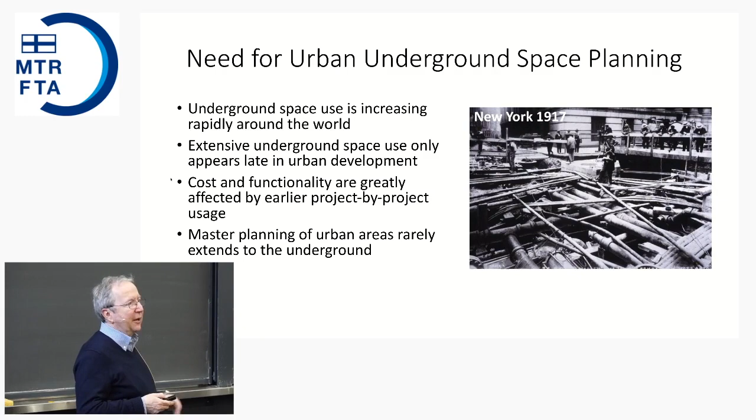You see that people have been thinking about this for a long time. There was a French engineer and planner who wrote about this and produced a number of sketches, like the picture on the right, looking at how you might use the public right-of-way in urban areas to improve transportation and provide better connection into the buildings on either side.

There was also the city engineer of Philadelphia in the US who wrote a paper you can download, from 1914, that basically said we already have a mess under our city streets. We're going to get more kinds of infrastructure that we don't even know what they are right now coming in the future. We'd better plan better for the underground.

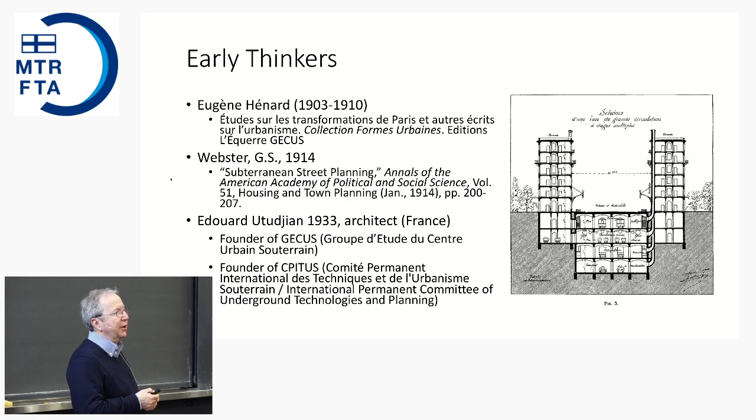And then the French in the 1930s, extending all the way through to the 1970s, formed a group to look at urban underground space planning. They had a magazine called Le Monde Souterrain, the underground world, and looked at the architecture, the planning, as well as the engineering of the urban underground.

Today, the different interest areas are following a rapid growth of interest and urban sprawl in the 1960s. Some well-publicized environmental disasters occurred in that time period, and energy consumption and energy use also made people look towards the underground because of the more constant temperature environment.

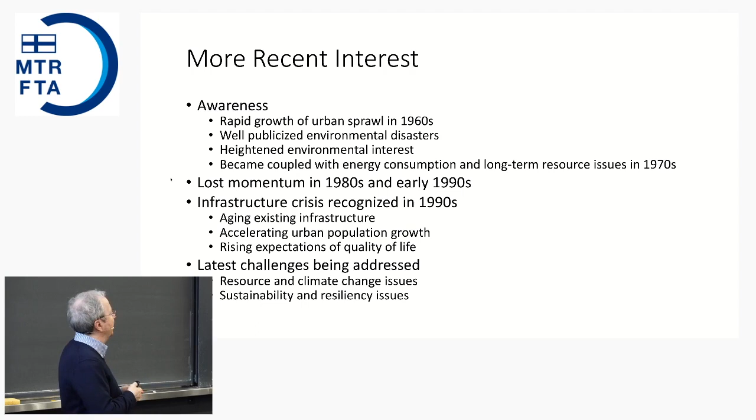Most recently, there's a lot of interest in sustainability and resiliency of cities, how we can provide for our future generations, and how our cities can withstand both natural and man-made disasters.

I won't go through this in detail, but you can track the relationship of building things underground to sustainability, and a copy of these slides will be available along with the lecture, so you can look at this at your leisure. But some of the main influences are that...

using the underground allows you to build a compact but livable city. In other words, you can put a lot of the things that don't need to be on the surface underground. You can still have fairly dense development above ground but still retain open space, and building compactly has a number of advantages in terms of sustainability.

The next two are isolation and preservation. You can group those together, and you can hide things underground. You can separate them in terms of climate, vibration, and not being able to see the things you put underground. That also has some benefits in terms of sustainability.

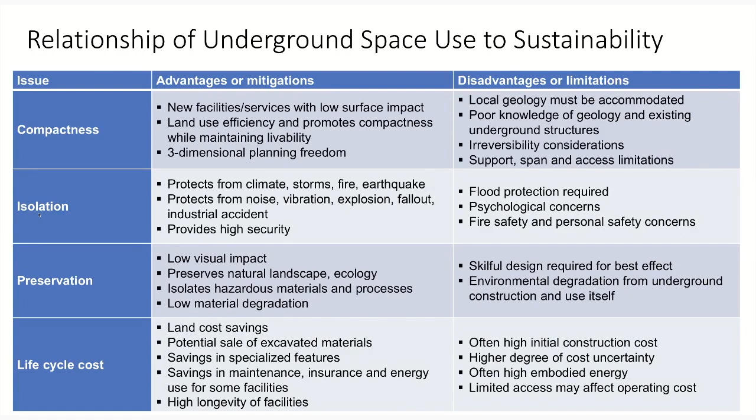And on the right, there are some of the disadvantages or limitations that go along with those benefits. So for any particular type of facility, you do need to look at the balance sheet, if you like, as to whether it makes sense or not.

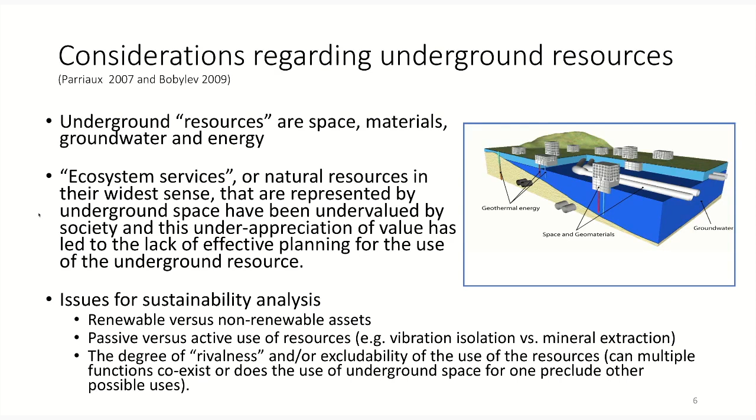Starting around 2000, the late 1990s or early 2000s, a researcher, particularly Dr. Parriaux from Switzerland, started to look not just at using the space underground, but saying the underground provides several types of resources that are important: space, materials which may be under urban areas, groundwater, and also the energy potential. We need to look at that whole system rather than just the use of the space, because using one of those resources may preclude or damage the use in other ways.

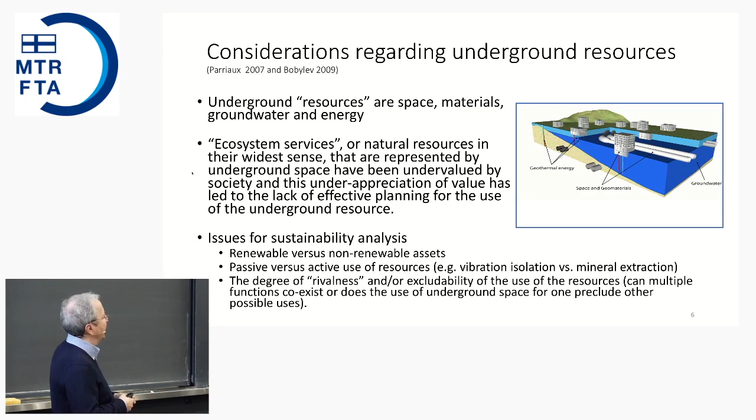And so you can find now in the literature quite a few papers and research projects that build on those ideas. And a lot of that comes down to deciding whether uses exclude other uses, or whether two or three different uses can occur together.

This is just a chart dividing the uses of the underground into renewable and non-renewable. And actually, the use of the underground, while it may help make the overall city more sustainable, most of the uses of the underground are in themselves non-renewable. In other words, once you use it that way, that resource is used up.

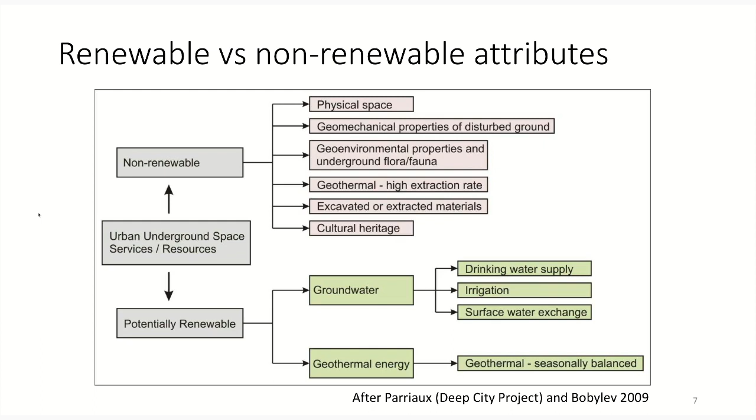The only one that appears on both the bottom and the top is geothermal, because if you use geothermal at a high extraction rate, you are changing the resource. If you're extracting heat, that area of the ground is getting cooler, and you're able to get less heat out in the future. If it's seasonally balanced, then it can be essentially fully renewable.

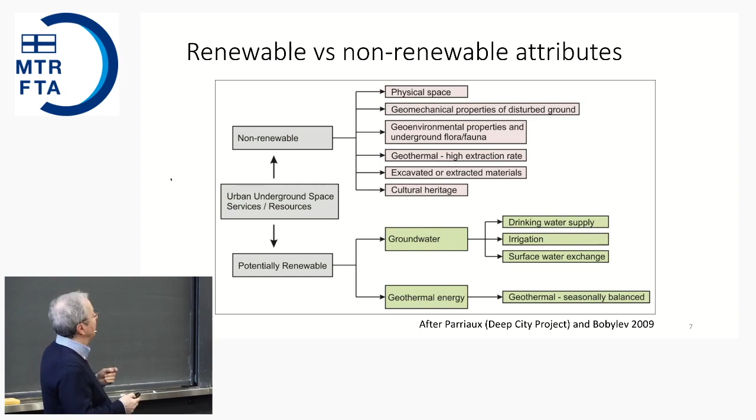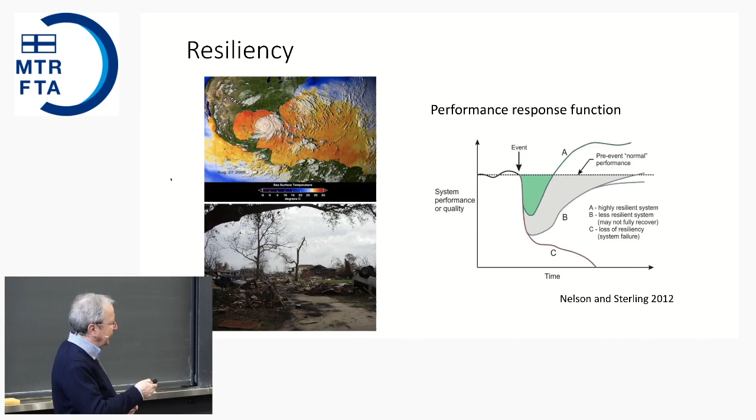As in the last case of sustainability, if we look at how the underground relates to that, we can find that for most external events, the underground does pretty well. It provides good protection. Flooding is obviously something you have to take great care with in an underground structure. But not all underground structures require you to go down into them. If you have a hillside or a mountain, you can have an underground structure that still does many of the other good things of the underground, but isn't susceptible to flooding because you go on a level or go up into it.

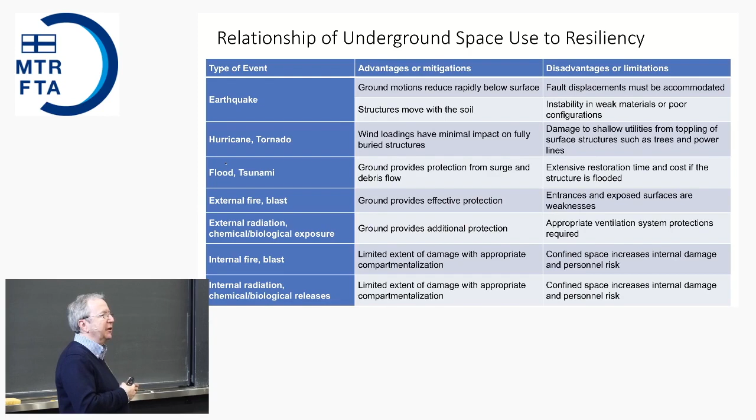Even with a big system like a metro, you've got a lot of investment, a lot of equipment, a large system, and only a few selected points that connect to the surface. So while in one sense it's vulnerable, if you protect those entry points, ventilation points, etc., you can have quite a resilient system. It's the internal events that give more problems to the underground, like an internal explosion, fire, or chemical release. There are ways of dealing with it, but that needs a lot of care when designing an underground structure.

A lot of the problems of resiliency today have not so much to do with the physical infrastructure of any one type, but the fact that everything is interrelated. Telecommunications, electric power, water supply, the availability of oil and gas, transportation systems - they're so interconnected that if any one goes down in a serious way, it has a ripple effect through the whole system. And with a lot of automatic controls operating between those systems, we don't fully understand the potential impacts in such complex systems.

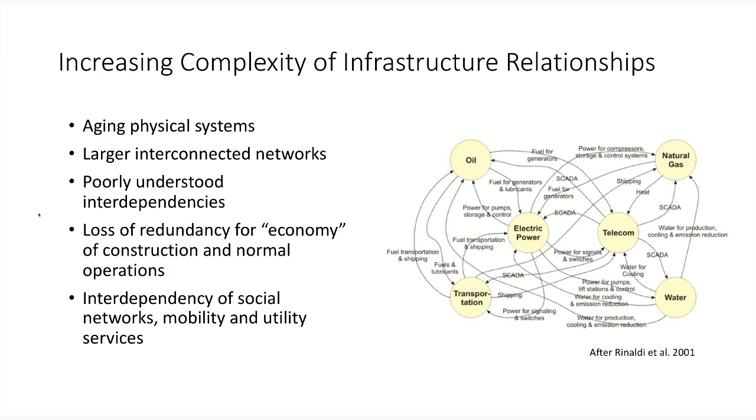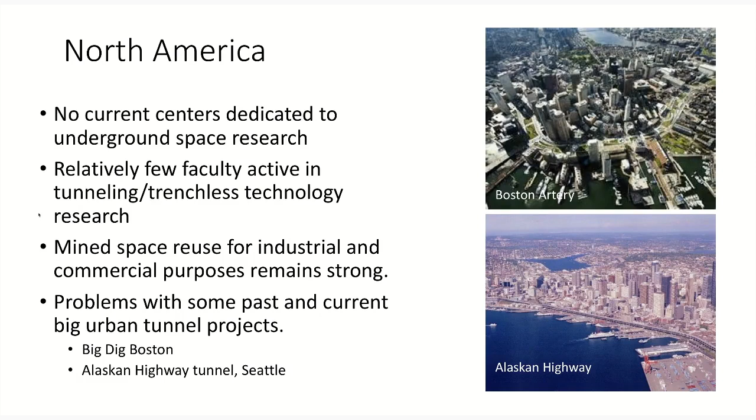Let me switch now and go through some different areas around the world and tell you what's been going on, or what is going on, in terms of underground planning, and what has gone on.

In North America, there are quite a few large underground projects being built, but not so much activity in terms of underground planning. The center I directed for 18 years at University of Minnesota closed in 1995, and there's no similar center at the moment anywhere in North America. In fact, there's a remarkably small number of professors and research groups that deal with tunneling or underground construction at all. The Colorado School of Mines is an exception, and there are a few other places. There's plenty of soil mechanics, plenty of rock mechanics, but dealing with underground construction, underground space use, tunneling - not so many.

There is very big underground space use in terms of reuse of mine space - I'll talk about that. There have been some large projects recently that have had major cost overruns or major issues, including the Boston Artery, which is done now, and the Alaskan Highway, where the tunneling is finally done, but I don't believe the tunnel is open yet.

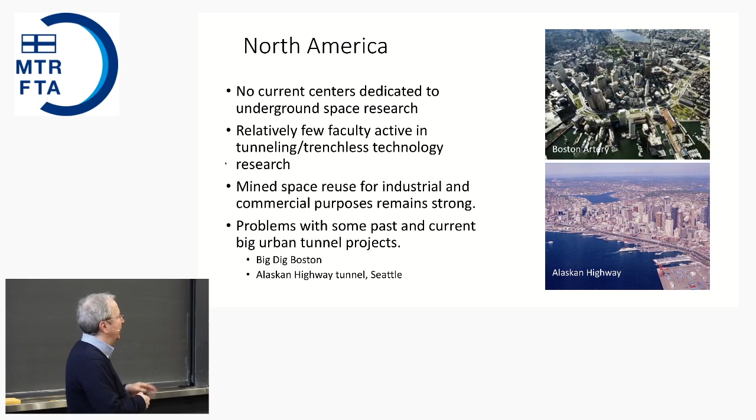Anyway, they got it going again, and the tunneling is finished. I think it's going to be the same, because the tunneling option in both Boston and Seattle, where the Alaskan Highway is, allowed the city to reconnect to its waterfront. There was a time, and you can see it in cities all around the world, where the ports became less important, a bit run down, and people said we need better transportation, let's run the freeway right between the city and the waterfront, where the land is cheap and things are a bit degraded. What that did was just shut the city off from one of its most valuable assets. Tunneling allows you to undo some of that.

We talk briefly about the city of Minneapolis, one place that quite early on did an underground planning study. Largely because our center was at the university, we were pushing the city to do that. We cooperated with the American Planning Association, and there is a planning advisory report dating from '81 or '82 that was published.

It had a very favorable layer cake geology: glacial till on top, then a very strong limestone, and then a soft, easily excavated sandstone that was drained out by the Mississippi River cutting through. So you could go into this soft material with a hard material forming a flat roof, spans up to about 15 to 16 meters, and in dry material. This layer cake geology extended underneath quite a bit of the Twin Cities, and had been used for cheese caves, beer storage, mushroom growing, but we were looking at a more extensive use, and did a planning study.

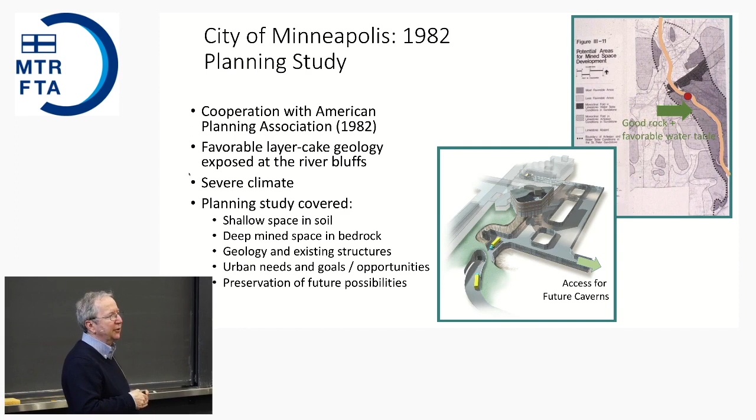We've heard about Kansas City. Are any of you familiar with the underground space in Kansas City? Heard about it? Yeah, a few people. There are probably more than 10, perhaps 15 or 20 different facilities in the region. They're mostly along a river bluff, so you can drive into the underground.

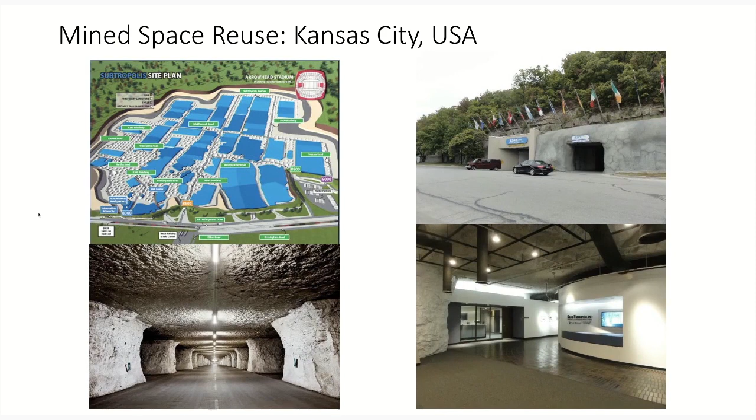They are typically maybe 30 to 50 meters below the ground when you get away from the bluff. There's a very nice parting plane in the limestone, and the rock that is good for aggregate for concrete and for road construction is in this layer. You blast very carefully, and in most areas you can have a roof that really doesn't need any rock bolts to be stable.

I think there are about 8 meter by 8 meter pillars, and perhaps a little wider, maybe 12 to 15 meter span across. This is a model in one of the facilities, and those little dots are the pillars. This is more than a kilometer in each direction. This is the office of the management company in that facility.

Over all these facilities, there are probably more than 5,000 people working underground doing industrial work and warehousing, and a good part of the National Archives for the country is put in these types of facilities.

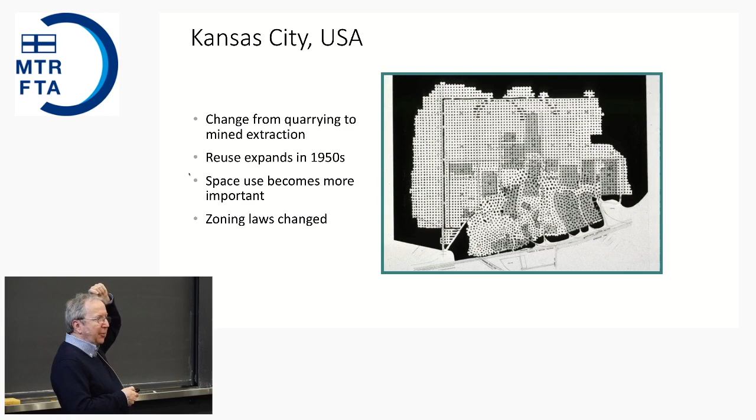The local planning department got involved in helping to facilitate that back in the 1970s and 80s. They changed the zoning laws. This is the same facility that was in the model, but a slightly earlier image of the underground, where all those little dots are 8-meter by 8-meter pillars. Here's the bluff along the bottom, and in that shaded area there.

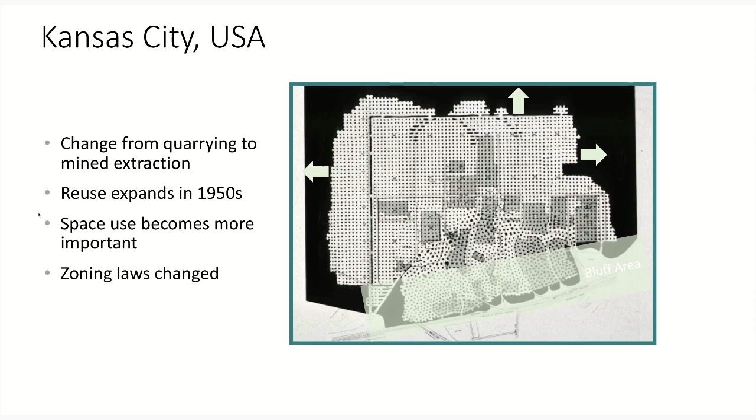These slightly darker areas were leased facilities, and I think that plan was made sometime in the 1980s, so much more extensively used now.

They were able to bring a railway line in so that a train could be unloaded in the underground. If you notice, the pillars here are all irregular, and here they're regular, except they've been modified to allow a rail line to come in up in that area.

Around this time, right here in the expansion, they realized that the eventual use of the space was more important and potentially more valuable than just the mining for sale as an aggregate.

So here is somewhere where, if I back up, you get space like this on the lower left. That's paid for by the mining. And then you just have to run in lights, put something down on the floor, and you've got an industrial space that they rent for about half of the price of industrial space above ground.

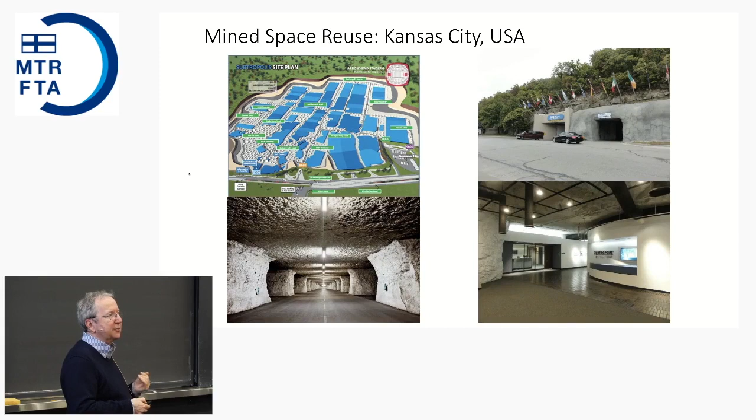Move up to Canada, quite a bit of underground in Canada and mining. But some of the things with regard to planning that it's known for is the underground shopping and pedestrian areas in Montreal and also notably in Toronto. These connect the metro station, the rail lines, most of the downtown buildings, university, many different types of facilities, and make the whole of the downtown a kind of indoor environment.

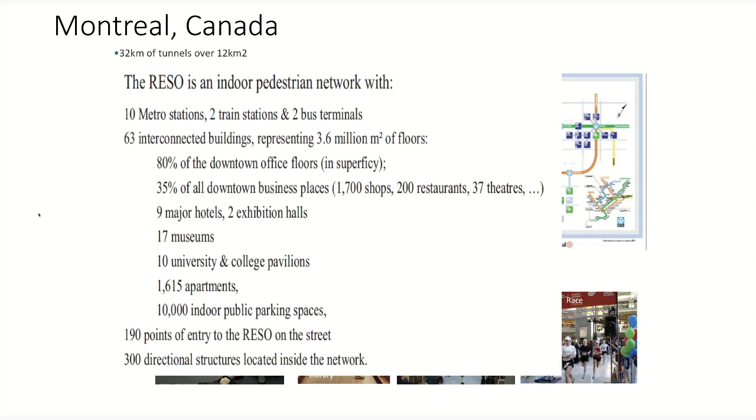Similar, I know you have pretty much the same in Helsinki here, and I think probably you have some of the same issues in Helsinki. It's a tremendous system. It's enabled the downtown to compete with the suburbs in terms of attractiveness as a shopping and commercial destination.

But if you look at part of the system, you can see that the underground pedestrian connections are rather convoluted. And the person who worked with this system said, I always choose one of the worst parts of the system to show.

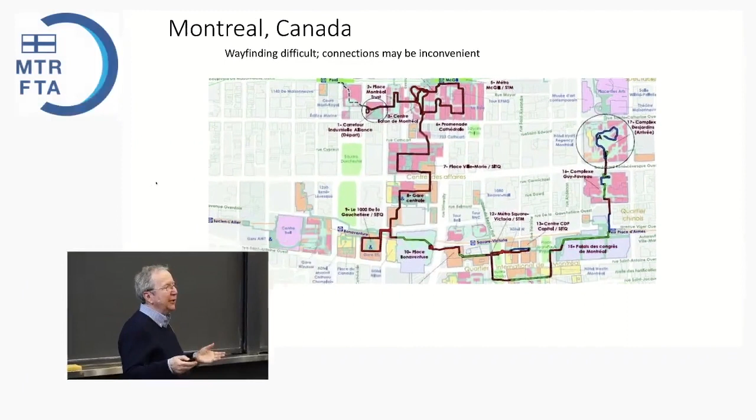So, I think there are parts of the system that are much easier to navigate and more obvious, but that is one of the drawbacks of a system where they basically encourage the developers to connect to the system, but they really didn't control where they connected, or try to put it all into a simple and easily understood system.

Let's shift to Europe. As you know, many large infrastructure projects - there's been a sort of re-evaluation and an upgrading of safety systems in the past couple of decades.

Scandinavia, and in particular Helsinki, has kind of shown the world, if you like, how to do planning for the underground. Although I think it's fair to say that most of the underground planning effort has been related to the use of the rock resource in Helsinki, as opposed to, let's say, connections like Montreal amongst the downtown buildings.

The Deep City project, with its concern for thinking about all the resources, the underground, started in Switzerland. There's quite a bit of interest in urban underground space in Russia, but it's hard to identify exactly if that kind of planning is going on or not.

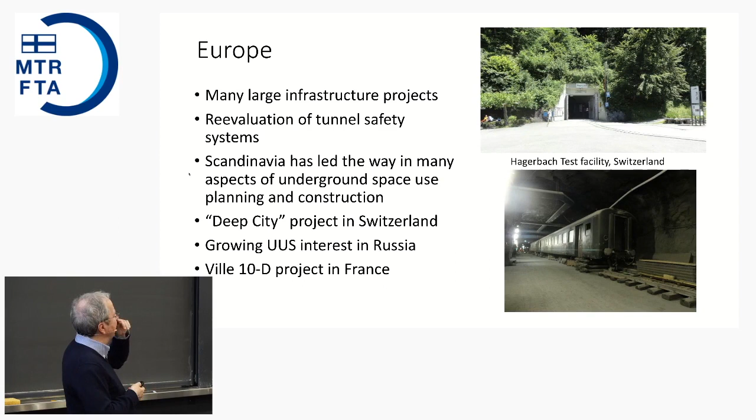France, which has done a lot with the underground over the years, has been trying to sort of revitalize that interest with what they call the 10D project.

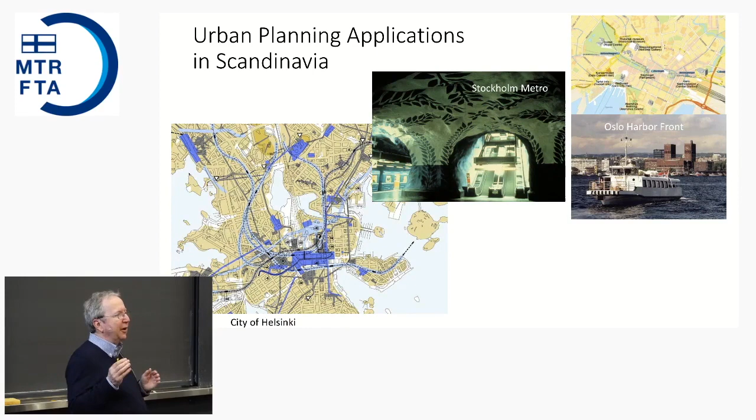And I think that if you look around the world, in a lot of areas, you can find that underground space use becomes a topic of some significant interest that lasts for a while, and then people get so far with it, and they kind of go as far as they can, and then the interest dies away, and another decade or two later, someone says, hey, we should be thinking about the underground, and then it kind of starts again. And certainly that's been the case in Minnesota.

So Helsinki on the left, you know, Stockholm is famous for its Blue Line, and is currently doing a lot of underground construction.

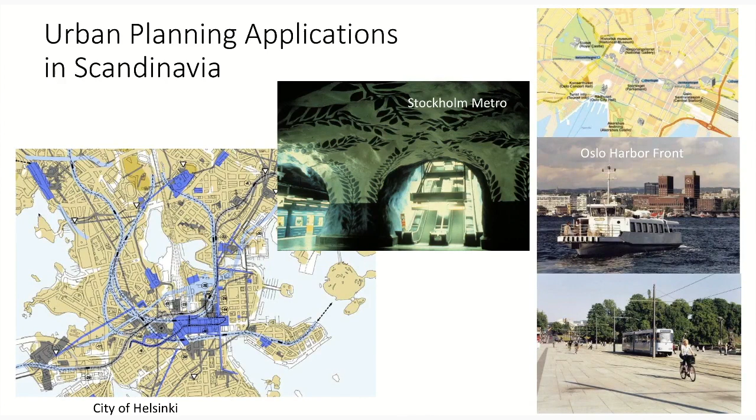Oslo also has this very good example where the freeway that cuts in front of the city hall has sparked, over the last two decades or so, huge redevelopment of that whole waterfront area that must just dwarf the costs of building the tunnel. But just before I move on from that, that appears to be such a good example, but it doesn't appear to be any analysis of the overall impact.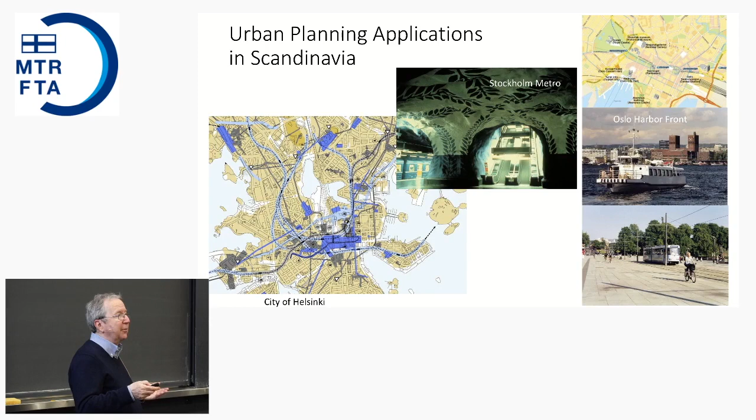We talked earlier about the cost benefit. I think that in many of these cases we need to get some real estate and planning professors and their graduate students to try and go back and track values and the opinion and all those things to try and track and document whether these projects, even though they cost a lot of money, are valuable in the long run.

Are we ready to do that? How are we going to do it? Who's going to do it? Who's going to pay? Do we have a policy? And they shifted around 1990 from having very little underground tunneling and underground works to actually, in the universities and in the planning departments, shifting to really look at not only underground but also multi-level planning for their spaces.

And within about 5 to 10 years, they did the Green Heart Tunnel, which was really on the forefront of tunnel boring. They introduced tunnel boring machines that they hadn't used before, and they had big research departments, for instance, in Delft University.

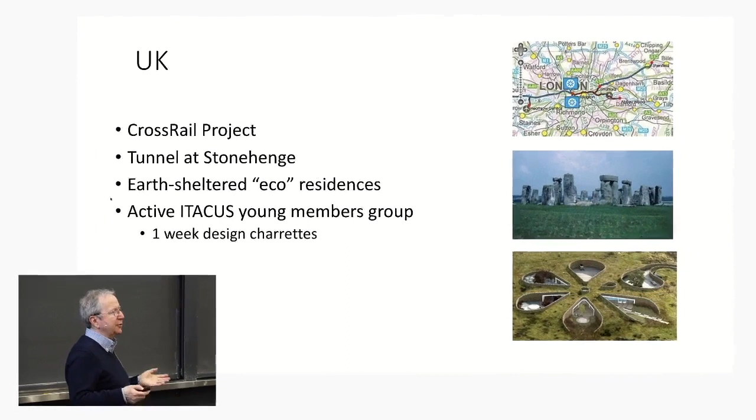UK, another country, huge amounts of underground construction, especially in London, but not so much cross-disciplinary or cross-infrastructure planning for how to use the underground.

It does appear they're finally going to build the tunnel for the road near Stonehenge, which has taken a long time to come about. And they do have an interesting activity, the ITA Committee on Underground Space. They have a younger members group.

And one of the things that ITACUS has been doing in connection with one of the planning groups, I can't remember the acronym for it, but anyway, they've been hosting one-week design charrettes with the young engineers and a couple of senior people.

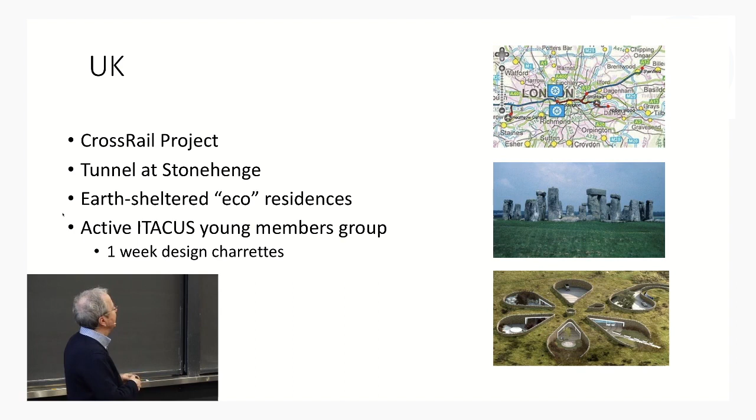City of Glasgow, for instance, had them come in and look at one area they were looking to redevelop. And those really developed some very nice ideas. They're great training for the young engineers and planners and architects, and I think a very successful program.

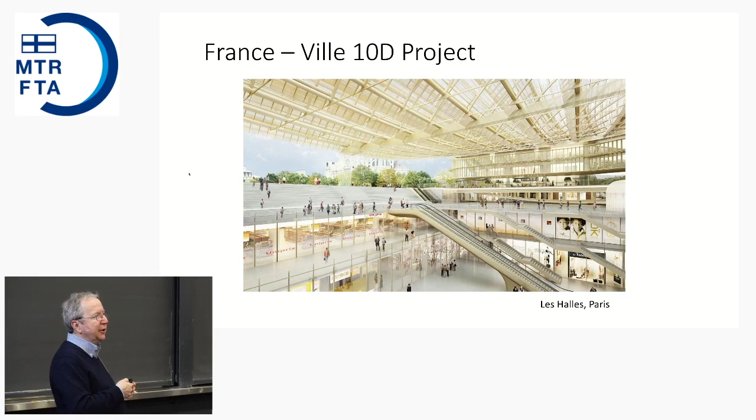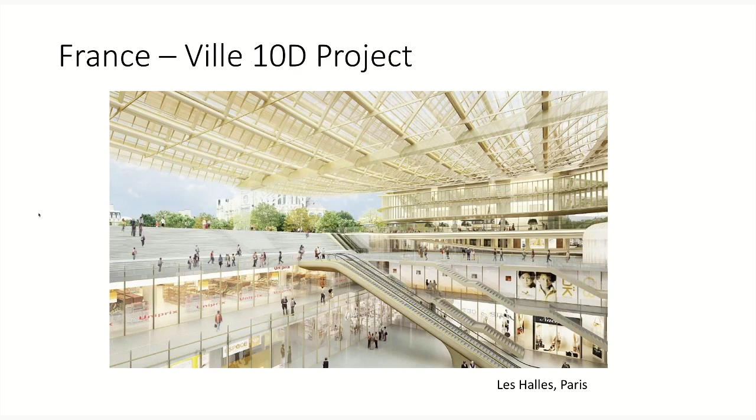This image is of the redevelopment of Les Halles in Paris. It's been, for the last 40 or 50 years, a major transportation and intermodal hub, but starting off as a very successful shopping area and attractive destination. As I understand it, they gradually brought in some young people attracting stores, which attracted young people to hang around there. And then a lot of the wealthier shoppers found that they didn't really like to go there and hang out, so the higher-end shops disappeared, and it got into a bit of a downward spiral.

And so this is part of a renovation and an effort to kind of revitalize that whole area. And also it's 50 years old, so it's probably time for a renovation.

Australia, again, you go back into the early 90s, virtually no tunnels. There was one Sydney Harbour tunnel built in the 80s, I think, and that was the first road tunnel in Australia. You might say, why does Australia need underground space? It's probably the least densely populated continent in the world, but its urban areas are crowded, land values are high, and they have as little surface space as anywhere.

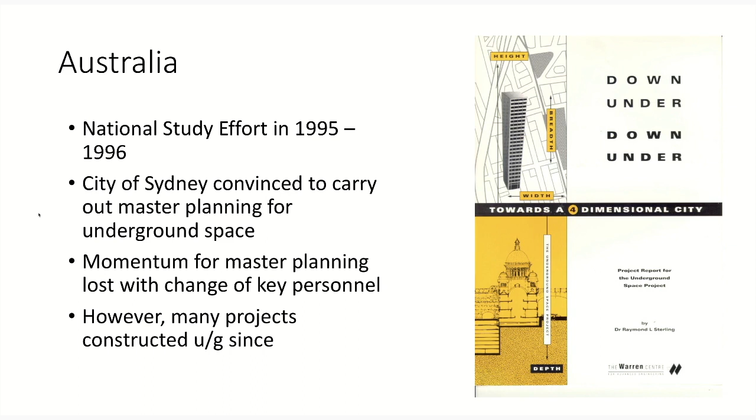And so I was fortunate enough to be involved in a study over about an 18-month period with about 90 or 100 Australian multidisciplinary groups: lawyers, finance people, geologists, engineers. We produced a summary report which we called Down Under, which they liked, but this momentum changed.

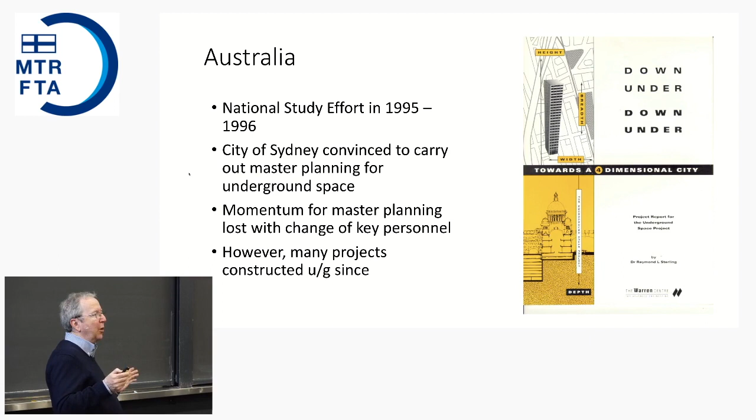When I left there at the end of the study, head of the city, the Sydney Planning Department had said, yes, we're going to do a master planning for Sydney Underground. I called and talked to someone about 9 or 12 months later. I said, how's that planning study going? And they said, oh, well, the mayor, they changed mayors, and now there's no interest in doing that anymore. So things that happen that should be so important that they should be independent of a few key people, but they're not. They require dedication, or they're required to be built in so that they happen even with the changes of interest over short periods of time. But Sydney has gone on. They're building many underground projects. It's not stopping underground projects, but as far as I know, there is no overall master plan for that in Sydney or any other city.

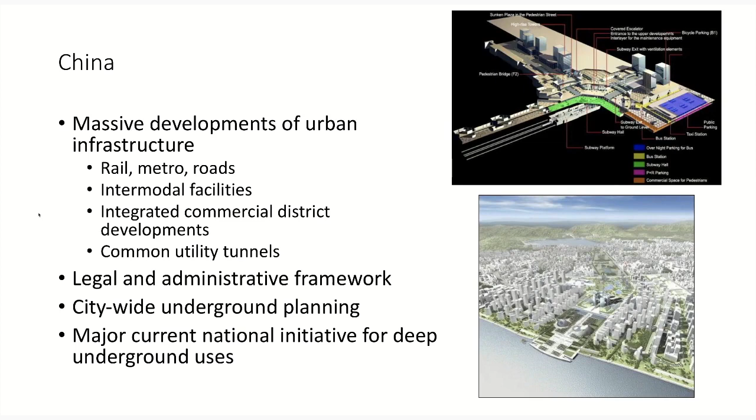China must be building more underground space than anywhere else in the world. They apparently, at any one time, have perhaps 500 tunnel boring machines operating, probably more than that now if someone has different statistics. They build these massive intermodal developments. This one's in Beijing, to connect high-speed rail to airport, to bus, to taxi, to metro. In this picture here, I forget how large it is, but this whole center open space being built in one of the cities in China is underlain by 2 or 3 levels of underground space for parking, commercial, and other uses.

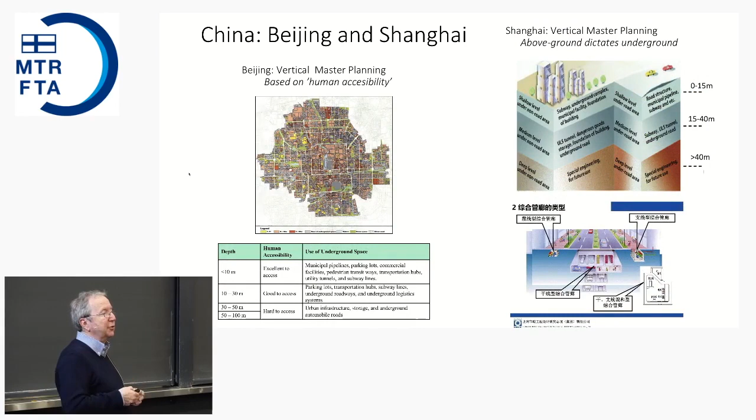And connected with that, they have also been doing a lot of work on planning, and a lot of that is accessible, but not so much in the English language. So if you want to access that, you probably have to link up with someone who can read and speak Chinese. Beijing has got a slightly different approach than Shanghai, but they are both related to dividing up the underground into depths for different types of uses. As many other areas around the world have found, China's been building a lot of things underground for the past 20 or 30 years, and now the new types of things they want to put underground, new metro, new high-speed rail lines, are having to go down into the very deep 40, 50 meter plus depths in the underground.

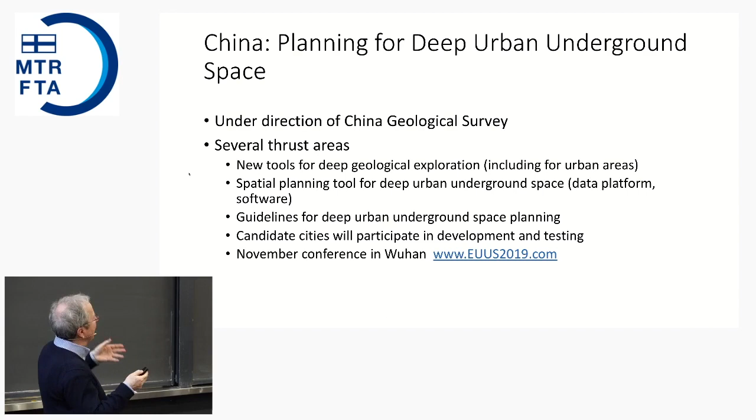There was a big national program to encourage multi-utility tunnels, and one of the latest things they're looking at is freight tunnel systems for freight delivery around the major cities, because they're finding that a lot of their traffic congestion in the city now, it's not just rush hour congestion, but it's all day long because people are ordering things on the internet and having it delivered. And there's actually a new, very large program under the auspices of the China Geological Survey to look at deep underground space use planning. It has a few things that don't seem to really go together, like deep geologic exploration along with urban underground space planning. But apparently that is because there were those two initiatives and somebody in the government decided to put them together. So it didn't really come from the bottom up, but that linking was done from the top down.

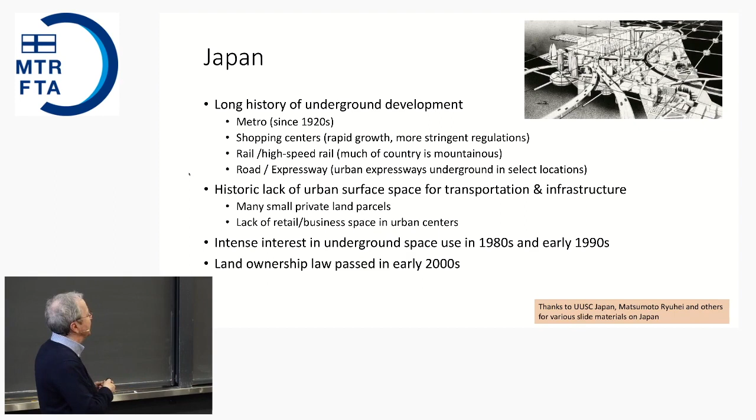Japan has had a long history of underground development. They did in the 80s and 90s a lot of work on underground planning. They also passed a new land ownership law. It took them about 15 years or so to think about it and get it passed. But they were also facing this being forced deeper and deeper underground, starting with the original Ginza line, the metro that was between 15 and 20 meters down, to the newest lines that are down around 50 meters.

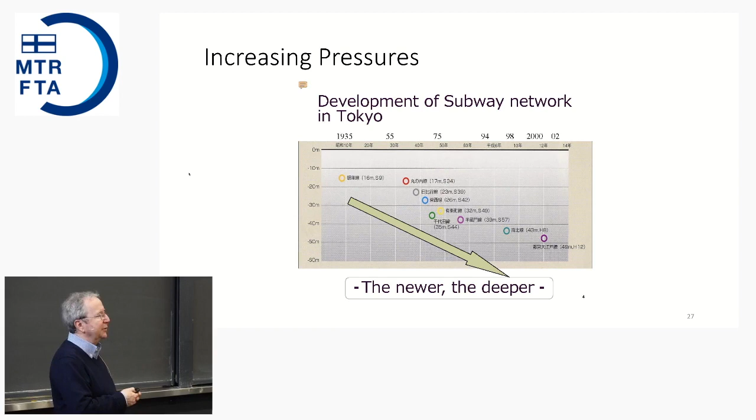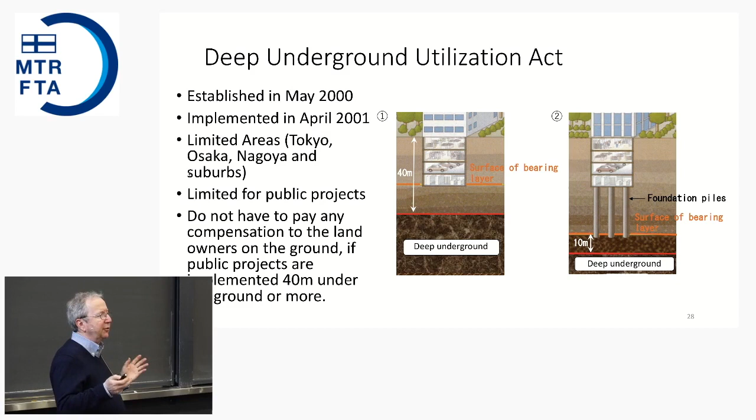Their underground land ownership law, which applies underneath three of the major urban areas, basically said that if you're more than 40 meters below for a public purpose, you can do a tunnel without having to go through all of the land ownership agreements with all of the individual property owners. If you already have a foundation here that goes down to depth that would be more than that 40 meters, then the public space would start 10 meters below the foundation.

They've also looked at different aspects of using the underground even for utilities, taking a small city with overhead power lines, putting those utilities underground, and cleaning up the signage. Over a period from 1992 to ten years later, the number of tourists increased from 350,000 to 3 million.

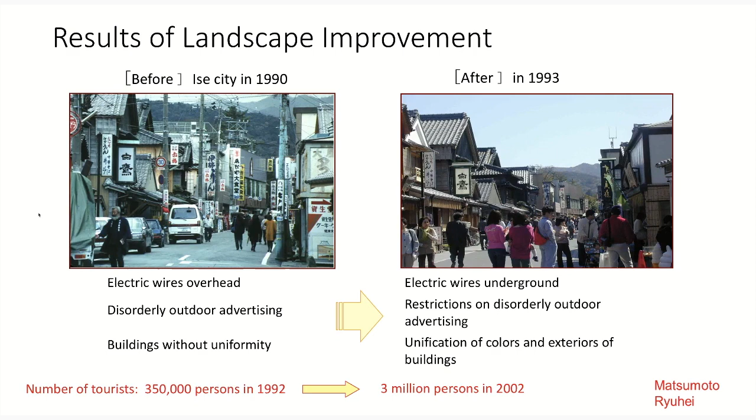So again, it's often very hard to justify the high cost of underground construction, but there are real economic benefits if you can just document them well enough to use in an argument.

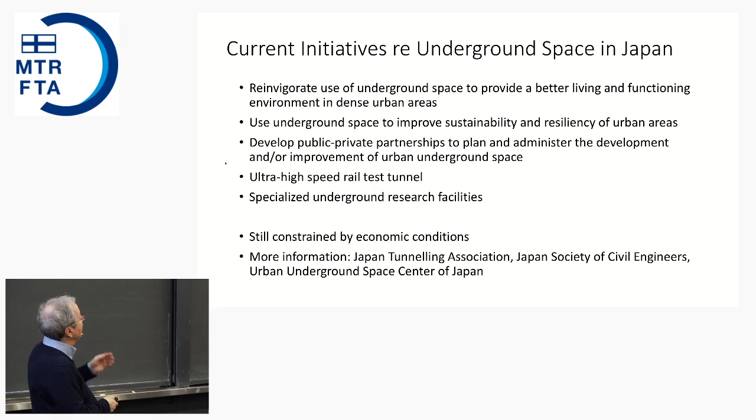As for current initiatives, the economy over the last 20 years in Japan has dampened a lot of their development work. There's a group called the Urban Underground Space Center of Japan, and one of the things they're working on most is improving urban underground spaces, particularly doing a lot of work in and around Tokyo Station, on the Marunouchi side and the Yaesu side.

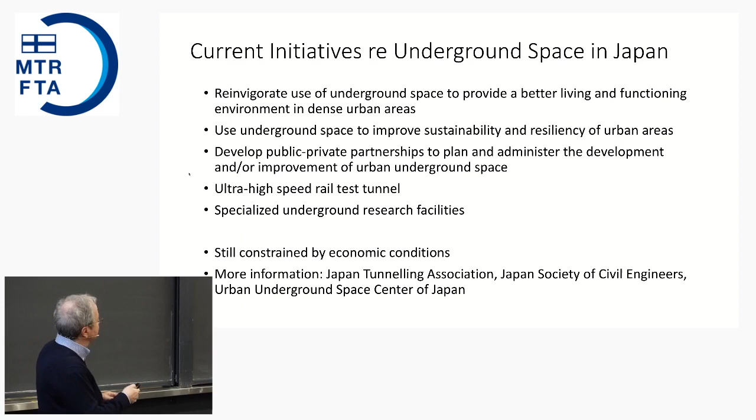Now, the last two examples are Hong Kong and Singapore. Let me just check—am I okay for time? Yes. Okay.

This reads from the bottom up. In Hong Kong, which has a high population and fairly small land area, they've been looking at using the underground for a long time. One thing I'll explain more in a later slide is that the very densely populated areas of Hong Kong with 100-story buildings are on the kind of flatter land right around the waterfront.

There's quite a bit of Hong Kong that is public park, consisting of tall, very steep-sided mountains. Those are both protected and not very easy to build on. So a lot of the interest in underground space use in Hong Kong is in some ways similar to Scandinavia, which is why there have been good links—it's about how to use the good rock conditions in the hills to provide facilities that ease the pressure on space and provide needed facilities.

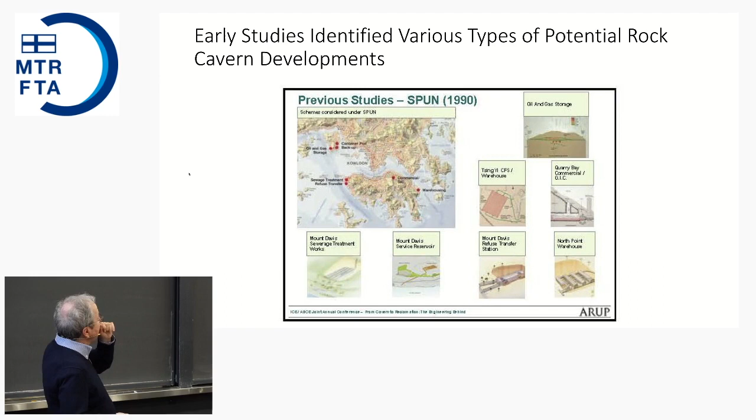They apologize for the poor quality of these images, but here you have Hong Kong Island, the Kowloon area, and what they call the New Territories. These are some of the different underground projects that have been looked at.

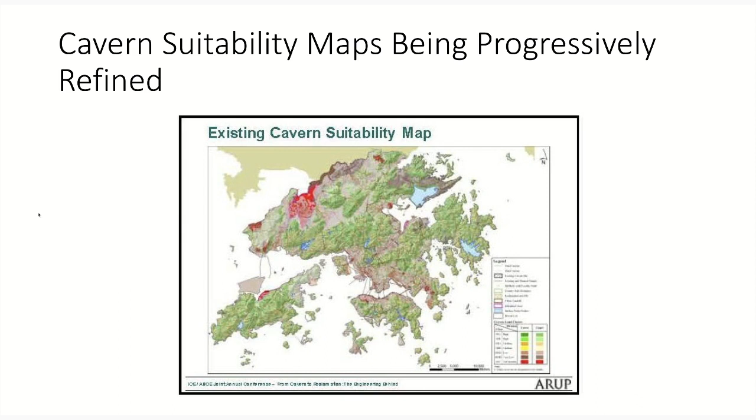Over the years, they've been gradually refining this cavern suitability map. Green is good suitability, red is poor suitability for caverns. There's a different shade of green, a brighter green, which is the good rock that is close to where the land value is highest and the space is needed most. They also have the major faults and problems delineated on that.

The other side of this is the geologic side, but the other side of what they've been doing is trying to determine what can go underground. That's partly the technical nature of the facility, but it's also the political feasibility of putting those things underground.

It's easier to put government facilities underground, but it's also not that easy, because the head of department or key people in those departments may not want to be moved underground. They may not want to be relocated away from nice areas along the waterfront back into a rock cavern on the other side of downtown—maybe better for the city as a whole, but not necessarily better for them or their workforce.

But it's clear, for instance, that you can move a sewage treatment plant from expensive land on the waterfront into a rock cavern, build the whole facility, expand it, and the land value released on the waterfront will more than pay for the costs of rebuilding it in the rock cavern.

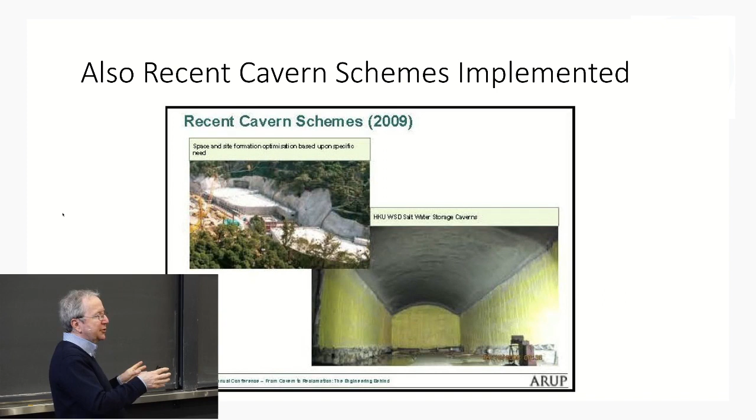Some typical types of projects include a lot of transportation-related projects—road tunnels, metro tunnels, rail tunnels, etc. But this is one sort of cavern use: a saltwater storage cavern. They use salt water for cooling, and this is on a university campus there. They had planned some surface tanks, but instead looked at building a rock cavern, saving the surface use on campus, and it turned out to be a much preferable idea.

So the Hong Kong government has put the use of underground space formally into the highest level of government documents, and so they do have that kind of authorization. They have been developing this long-term strategy for cavern development, public engagement, etc., finding out what uses to put underground, and the most preferable ways to do that.

These are some of the more recent studies. Here is the underground space development, which is more about interconnectivity of the buildings downtown. If you've been to Hong Kong, there's a lot of people walking about, but over the years I think they've given preference to easing the traffic. So you're walking along a street that looks like you can walk right down to where you want to go, and all of a sudden there's access to a freeway ramp that just cuts you off. And so they're trying to solve some of those issues and make it easier to move around Hong Kong as a pedestrian and reduce pedestrian traffic conflicts.

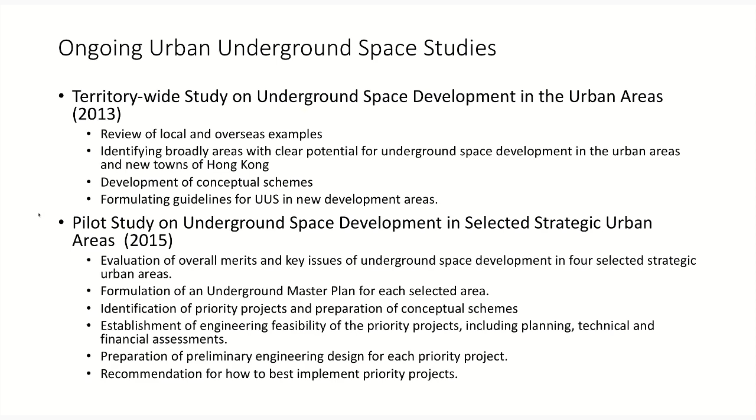So the high land costs and the land use issues are driving the interest in Hong Kong, but there's still some ongoing work to do to make all that happen.

So let's move on to Singapore, and I have a couple of colleagues with me here from Surbana Jurong company in Singapore that are involved in a lot of the infrastructure work there, and obviously very interested in how Singapore can use its underground space.

This is an interest that started in Singapore, I would say, in the early 90s, and has kind of gradually picked up steam ever since then. They approach things in a very thorough, methodical fashion, and either at the end of this year or probably next year, they're going to release their master plan for underground space use in Singapore. So it's been the result of, from the early studies through to now, perhaps 20, 25 years of gradual development.

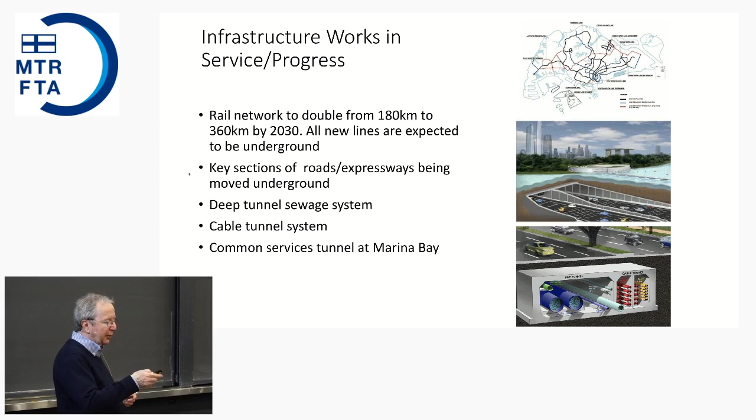So Singapore has been building a lot of infrastructure underground for the past 20, 30 years, including some multi-utility tunnels, taking freeways that were on the surface, moving them underground and making them larger. Also a deep sewer tunnel system and a deep cable tunnel system. So a lot of that work has been going on, but they've also been looking at space uses.

There's a lot of soft ground and high water table in Singapore, but there is also some hard rock. The northern central part of Singapore has some hills, and underneath is a pretty decent granite, the Bukit Timah granite. And in the Bukit Timah granite is the Mandai ammunition storage facility. They moved that underground, and because they could store the ammunition closer together by moving it underground, they actually saved more than 1% of the land area of Singapore. I mean, that's pretty significant, right?

The Jurong oil storage caverns are underneath the seabed and partly underneath Jurong Island, part of Singapore. Scandinavian firms were very much involved in the design and construction of that cavern.

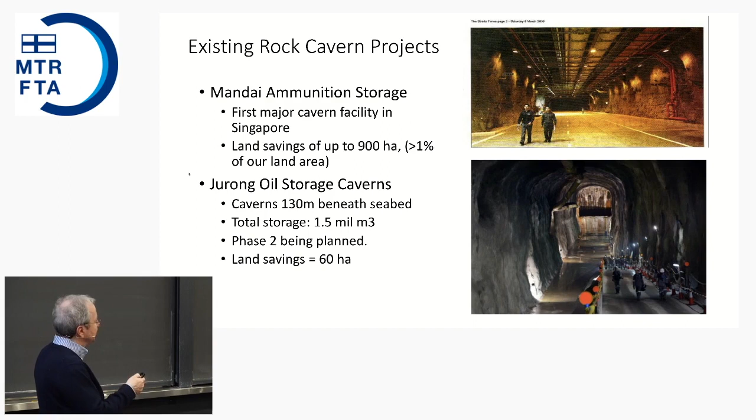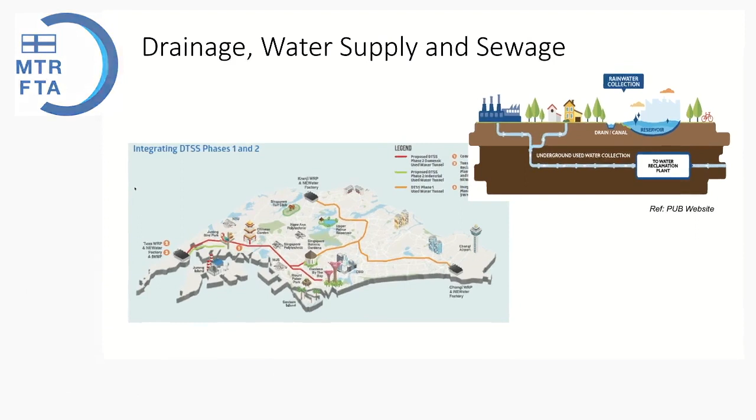Some of the different projects - this is the deep sewer tunnel system that is going through the main areas of Singapore.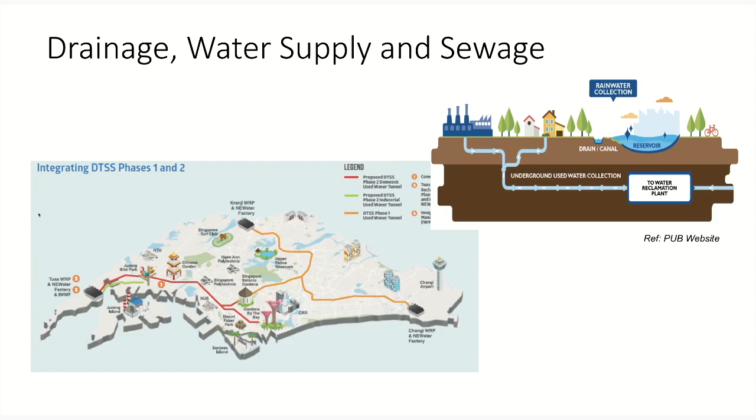And I want to show this one, which is a concept - it's not clear yet that all the different components will go forward, but the idea is that Singapore has enough rainfall on the land surface to have enough fresh water for the population, but it doesn't have enough storage to allow that to happen, so they import a lot of water. So to make themselves more self-sufficient, they would store the water.

They could make two-level caverns for storing the water and have a pumped hydro scheme between those. They would also be able to stop some of the flooding, because like other parts of the world - and I understand Helsinki a few weeks ago - they're getting heavier rains than they got before, and that would provide flood control.

And then also they import all their aggregate - they don't have any open quarries anymore, they don't have any underground quarries. Designed in the right way, a long-term project like this could provide a lot of the aggregate supply within Singapore. So, but it's a challenge to get so many different components to all come together and be agreed on.

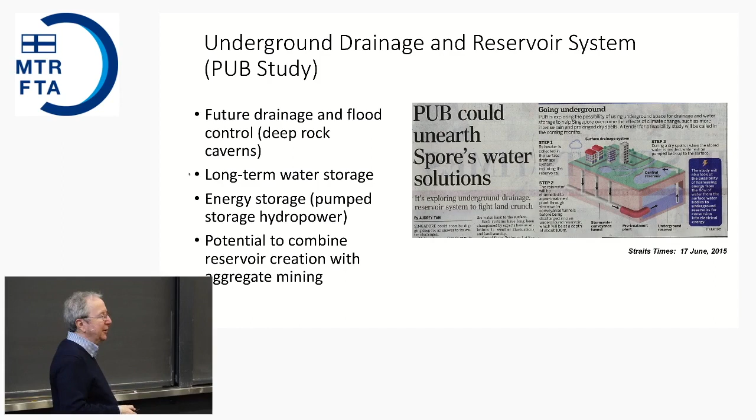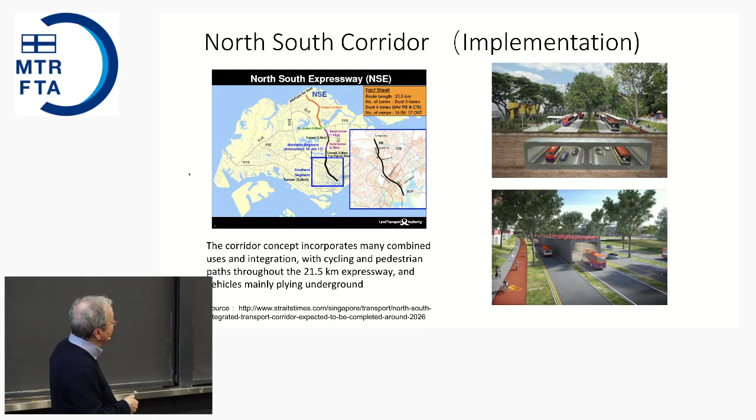A lot of transportation, like other parts of the world - they're looking to improve cycling and pedestrian access, as well as put a lot of the traffic underground.

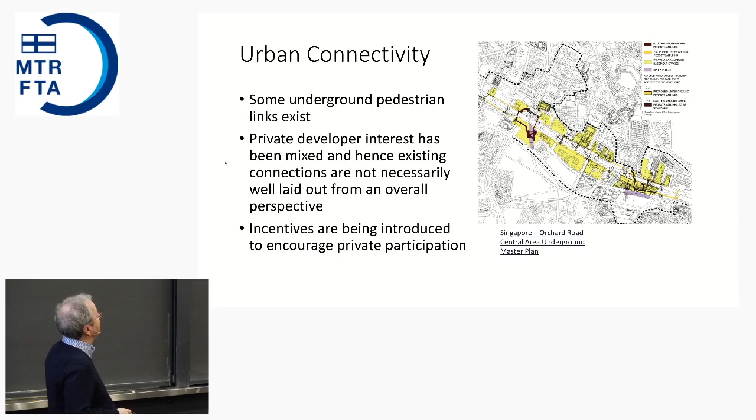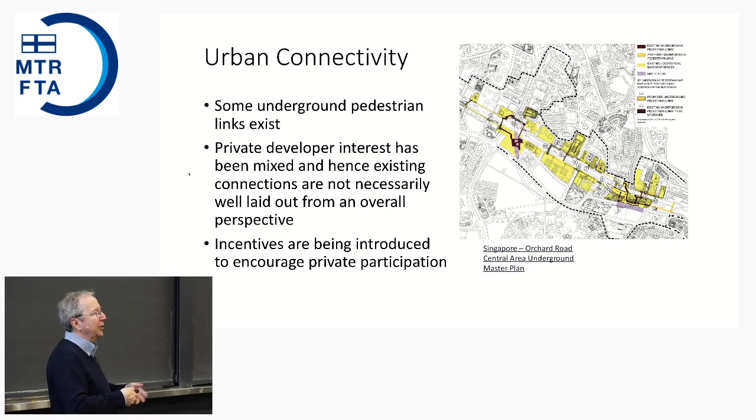This urban connectivity - here you can see Orchard Road, which is one of the famous shopping areas. It does have some pedestrian connections, but they've been made in a very haphazard fashion, so they're rather confusing and not that convenient to use. The planning department, the Urban Redevelopment Authority, is trying to figure out how to keep it with private - you know, because these are private properties connecting to private properties - but how to make the right incentives to get them to do a system which works for the public connections as a whole.

Some of the interest from the futuristic point of view is that they are moving the dock and the container port from right by the downtown area all the way to the end of the island - one of the largest container ports in the world.

And some of the new development areas or redevelopment areas - they're looking at these multi-level developments, pedestrian-only areas with the transportation down one level, and lots of new housing.

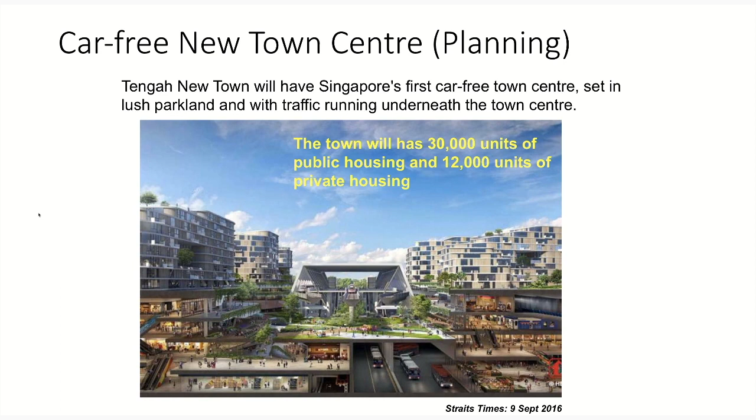So finding what's the right underground space to use is a challenge. Justifying cost benefit is another challenge. Coordination and getting the stakeholders to agree to do that. Integrating the requirements.

There was a while where people tended to write articles saying things like Singapore is moving underground, and all of a sudden there's a public reaction: we don't want to live underground. And then the government has been, in the last 5 to 10 years, at great pains to say we're not talking about having people live underground, but rather moving the things that don't need to be on the surface underground so that you'll have more space. It's very easy for the wrong message to go out.

They also are looking at building the right competency in people. They would rather that Singapore move from being an importer of experts into Singapore to actually developing the world leaders in these areas in Singapore and be able to export the technology.

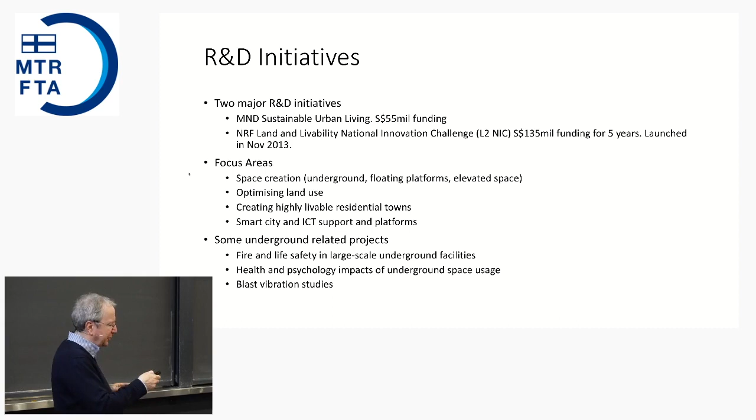The blast vibration studies project was not nearly as big as that - I forget how much that was. There's also work on the geologic database.

You've got a very good system here in Helsinki, so I don't think there's too much to say about that except that it's well done, and there are legal provisions requiring the input of data. I believe even if you uncover an underground utility during construction work, you're required to measure where it is and what it is and report that into the system.

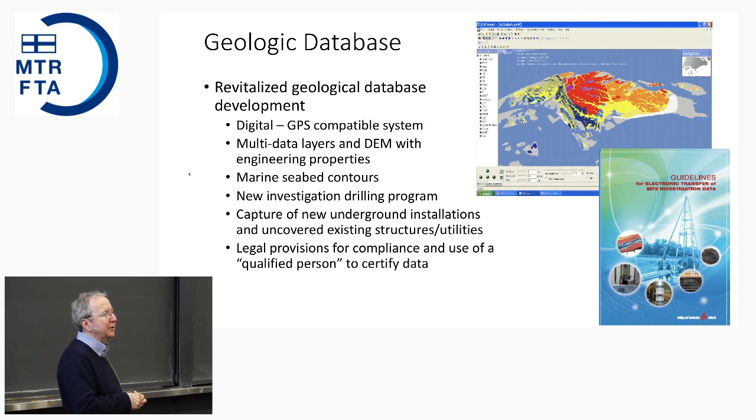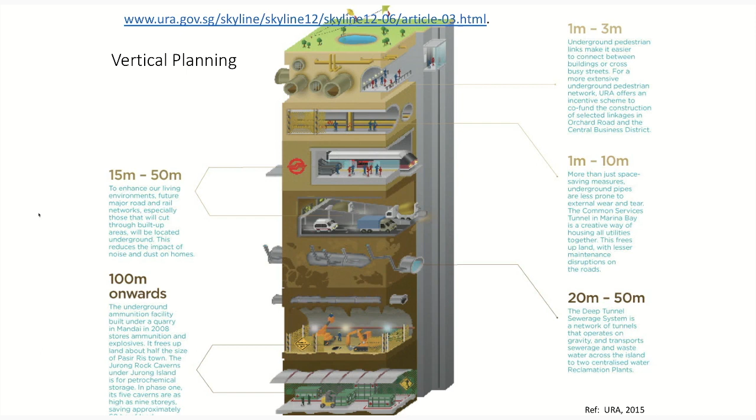And then they have public information about what Singapore is using underground and what they're planning to put underground. These are in public displays - they have very good exhibitions about their planning work.

How am I doing for time? This is - I like to use this one, but I don't want to take too much time. Let me just say it quickly.

One of the things that a lot of people tend to feel is that there's plenty of space underground, so if we mess up this bit, we'll just go and use somewhere else underground. But if you take the volume of the whole Earth and compare that to a skyscraper that is 30 meters by 30 meters and 100 stories high, and then look at the area we have mined - the deepest we've mined is a few kilometers.

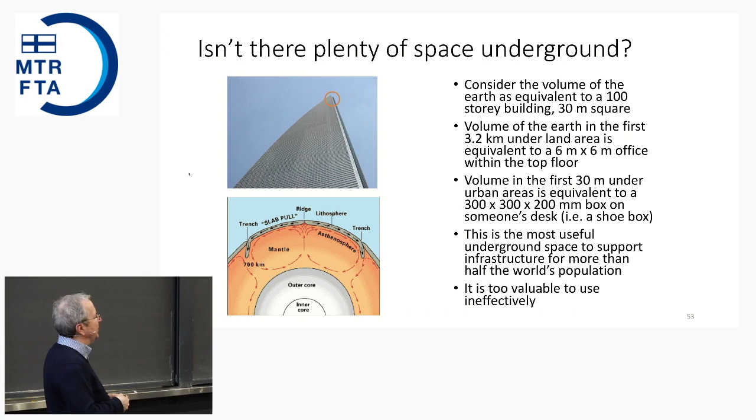If you look under urban areas and take the first 30 meters underneath the urban areas of the world, that volume compared to the volume of the Earth is like a shoebox on one desk on one floor of that building. And that is the most useful underground space, supporting infrastructure for more than half the world's population. So it's not an infinite resource - it's a very small resource, and we need to plan it and use it wisely.

So to finish up, I think underground space use - there are other benefits, but it's mostly driven by land use considerations. There are major challenges with it, which I've listed. 3D geologic data is essential, and more countries need to follow the example of Helsinki and Singapore and Hong Kong and do the planning of the underground.

And to figure out why isn't that automatically done? Why is there this sort of only looking at planning at the surface and not automatically including this important resource underneath, with different space uses and groundwater and other things underneath.

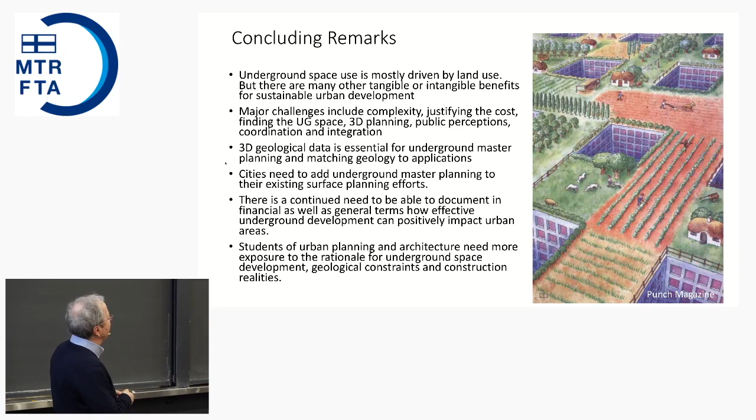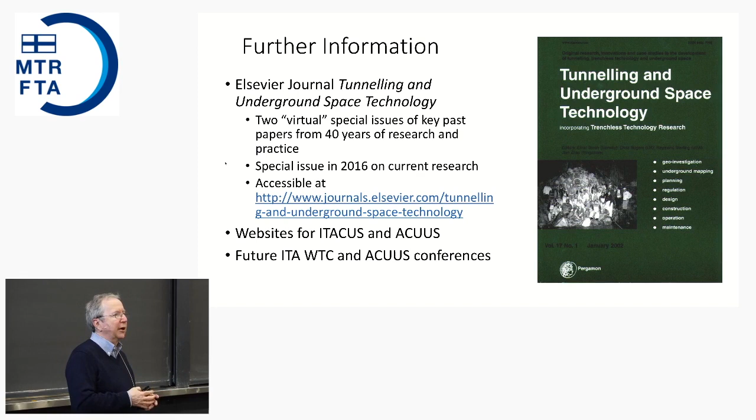So with that, I will finish the talk, and I'm happy to answer questions or engage in discussion - maybe some of you have some other ideas or some issues that I haven't touched on. So thank you very much.

Yeah, sorry, there is still time for questions. I think the coffee is already served, but it can wait. So please - the first one is not a question, it's arguing you. Okay, good. Okay.

You said that geothermal energy is renewable, especially if you load it during summertime. But we have made some calculations and modeling, and if you have a well 1,000 meters deep, it lasts 50 years maximum, then the temperature is zero. If you load it during summertime, you may get 17 years more, but it's only partly renewable. Do you agree or disagree?

Yes, and when I said renewable, I was actually thinking more about systems that are installed shallow, just below the surface, going horizontally rather than down. In those systems, the sun regenerates the soil in summertime, and if you extract the heat out, it can be close to sustainable.